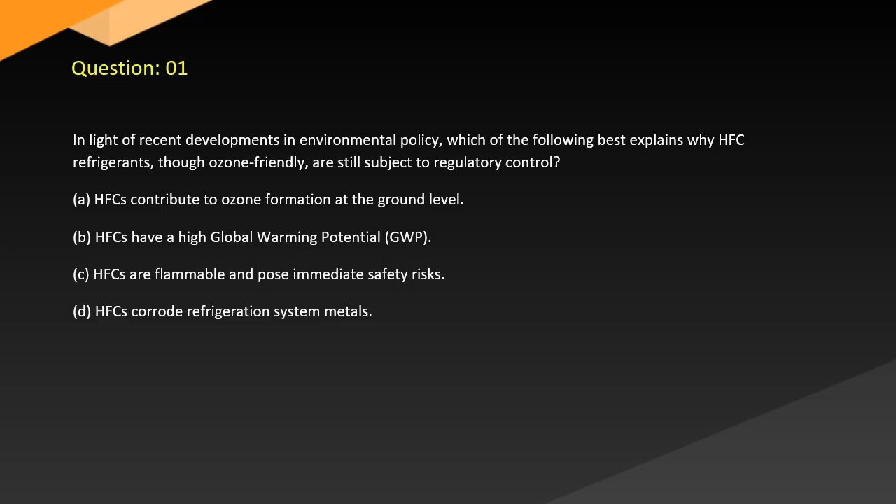Correct answer: B. Explanation: HFCs do not contain chlorine or bromine and therefore do not deplete ozone, but they significantly contribute to climate change. Under the Clean Air Act and the AIM Act (American Innovation and Manufacturing Act), EPA regulates HFCs to reduce their environmental impact. Their regulation aligns with Kigali Amendment goals, even though it is not yet ratified in all jurisdictions. See EPA Fact Sheet on HFC Phasedown, Clean Air Act Section 608, for further reference.

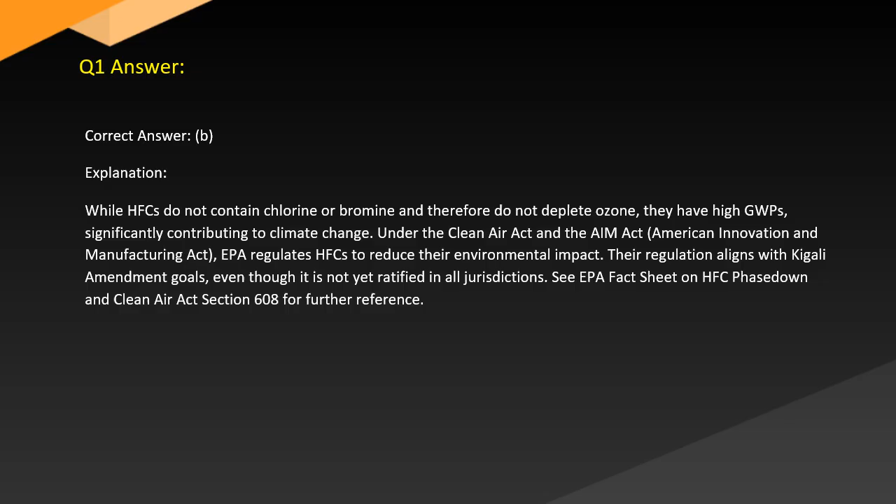Question 2. When evaluating the merits of leak detection, a tech suspects a charge loss in a high-pressure refrigeration system after a rapid rise in superheat and poor cooling. What is the best first step he should take? A. Recharge the system to full capacity and monitor. B. Evacuate the system immediately. C. Conduct an electronic leak check after isolating the system. D. Replace the expansion valve.

Correct answer: C. Explanation: Per EPA guidelines under 40 CFR Part 82 Subpart F, suspected leaks in high-pressure systems should be verified using EPA-approved leak detection methods, including electronic detectors. Charging without confirming the leak violates recovery and repair obligations, and unnecessary evacuation risks contamination. Superheat rise typically indicates undercharging due to leakage, not component failure.

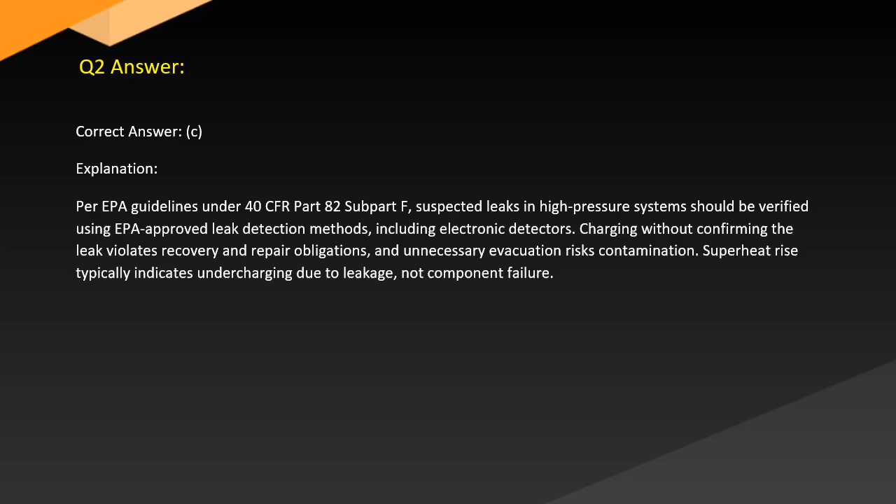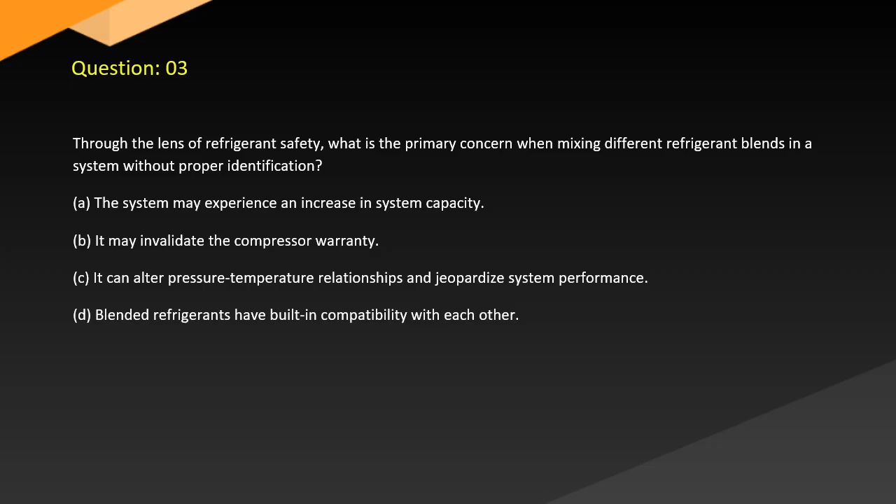Question 3. Through the lens of refrigerant safety, what is the primary concern when mixing different refrigerant blends in a system without proper identification? A. The system may experience an increase in system capacity. B. It may invalidate the compressor warranty. C. It can alter pressure-temperature relationships and jeopardize system performance. D. Blended refrigerants have built-in compatibility with each other.

Correct answer: C. Explanation: Blends like R-407C or R-404A have precise composition ratios. Mixing different blends or pure refrigerants alters pressure-temperature behavior, resulting in inaccurate superheat or subcooling readings. Potential overpressure and damage is also prohibited under EPA guidelines and voids reclaiming potential. Recovery must not mix refrigerants to preserve reclaim standards. See EPA 608 Rules on Refrigerant Purity.

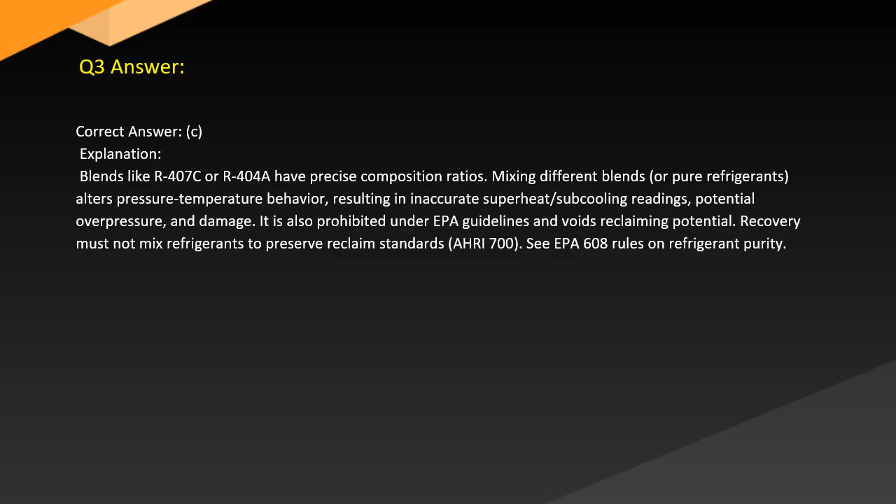Question 4. As illustrated by a recent inspection, Gomez discovered a centrifugal chiller leaking R123. The unit has leaked 20% of its charge within a 12-month period. What is she legally required to do next under EPA regulations? A. Shut down the system permanently. B. Refill the charge and continue operation. C. Repair the leak within 30 days or develop a retrofit retirement plan. D. Conduct another leak check after 60 days.

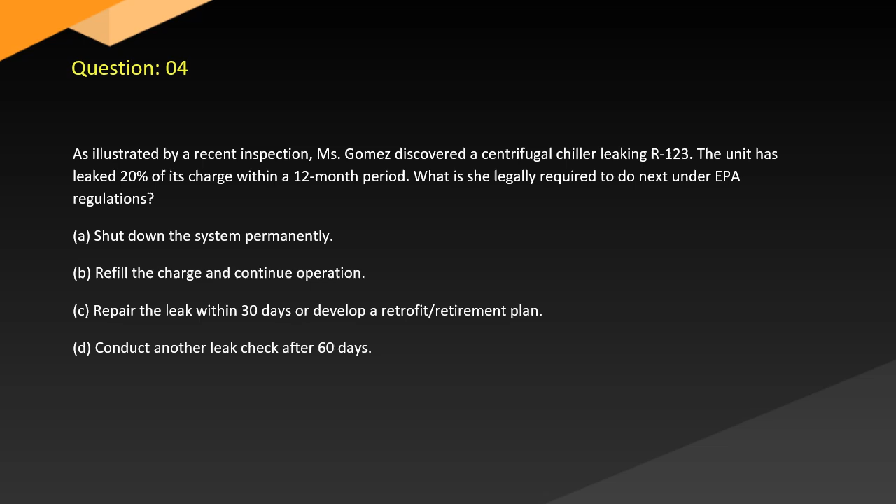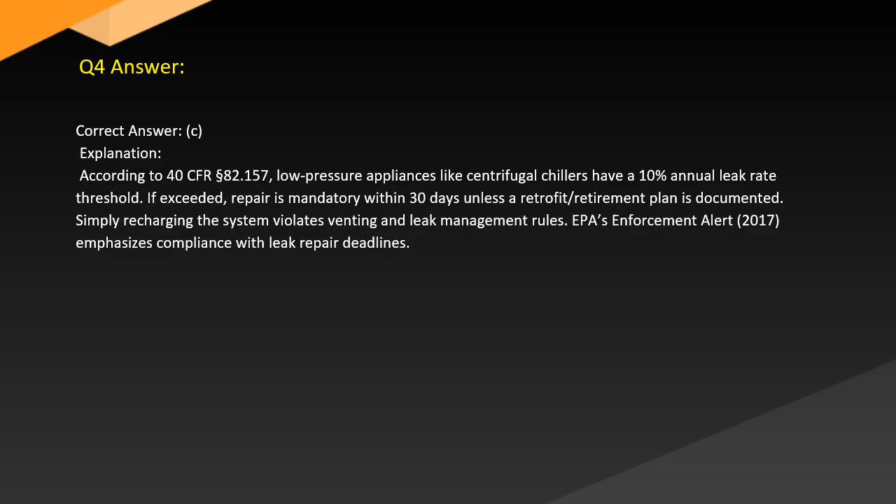Correct answer: C. Explanation: According to 40 CFR Section 82.157, low-pressure appliances like centrifugal chillers have a 10% annual leak rate threshold. If exceeded, repair is mandatory within 30 days unless a retrofit retirement plan is documented. Simply recharging the system violates venting and leak management rules. EPA's Enforcement Alert 2017 emphasizes compliance with leak repair deadlines.

Question 5. When considering safe refrigerant recovery from a system with a non-operating compressor, which technique is most appropriate for maximizing refrigerant removal? A. Use a system-dependent recovery unit. B. Apply vacuum through the suction line only. C. Recover liquid first, then vapor, using both high and low sides. D. Only use passive recovery methods.

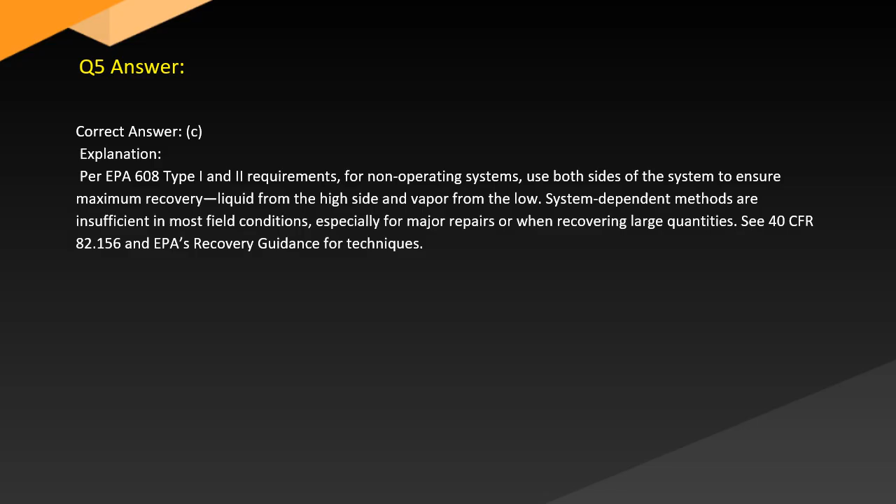Correct answer: C. Explanation: Per EPA 608 Type I and Type II requirements for non-operating systems, use both sides of the system to ensure maximum recovery: liquid from the high side and vapor from the low side. System-dependent methods are insufficient in most field conditions, especially for major repairs or when recovering large quantities. See 40 CFR 82.156 and EPA's recovery guidance techniques.

Question 6. The underlying principle of oil compatibility dictates that using incorrect oil types with specific refrigerants may result in which of the following system failures? A. Faster thermal expansion in capillaries. B. Excessive subcooling in the evaporator. C. Oil logging in the evaporator and compressor wear. D. Increased condensing pressures.

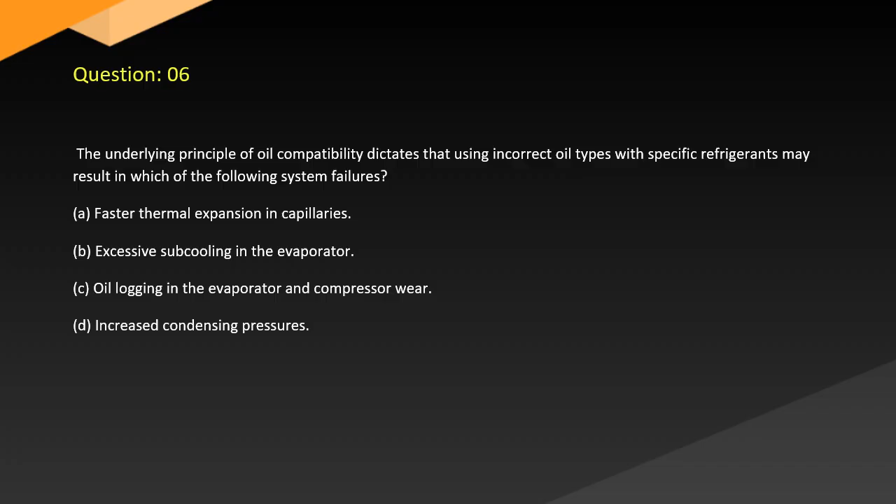Correct answer: C. Explanation: Incompatible oil-refrigerant pairs, like using mineral oil with HFCs, result in poor miscibility, leading to oil trapping, logging, and lack of lubrication in the compressor. This causes wear and system inefficiency. POE oils are often required for HFCs. EPA 608 requires technicians to confirm oil compatibility when retrofitting or charging systems, in line with ASHRAE guidelines.

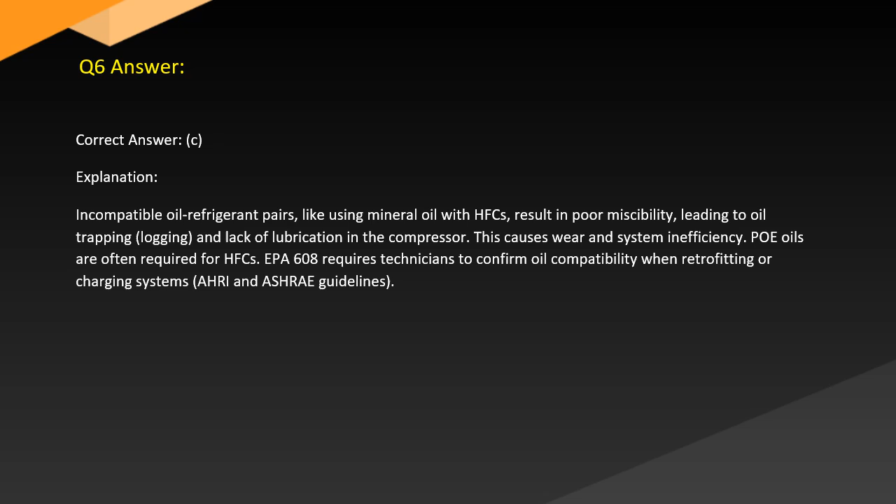Question 7. Taking into account system evacuation procedures, what could occur if Mr. Liu opens a system for servicing and skipped proper dehydration using deep vacuum?

A. The system will perform normally after recharging. B. Moisture will help increase system pressure. C. Acid formation may damage components over time. D. The compressor will increase cooling capacity.

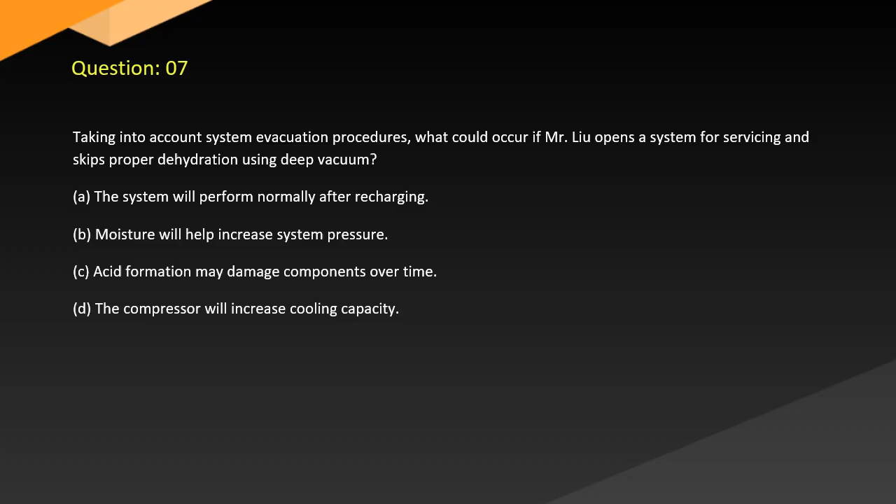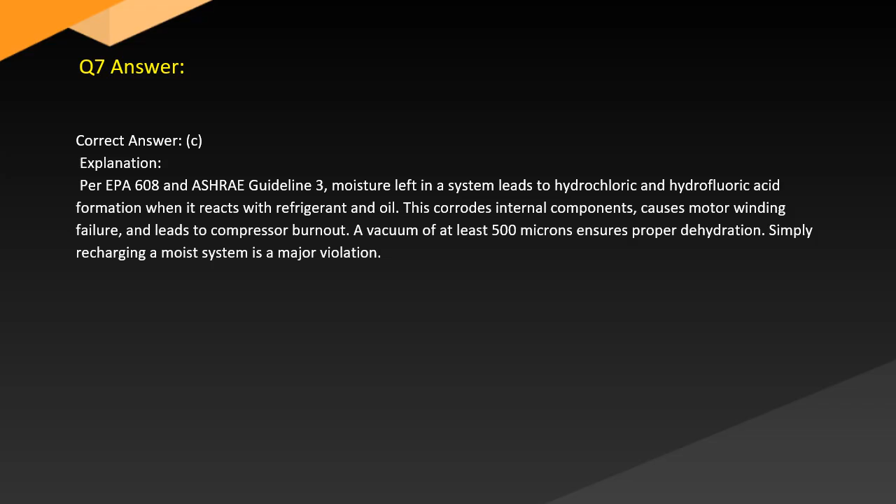Answer: C. Per EPA 608 and ASHRAE Guideline 3, moisture left in the system leads to hydrochloric and hydrofluoric acid formation when it reacts with refrigerant and oil. This corrodes internal components, causes motor winding failure, and leads to compressor burnout. A vacuum of at least 500 microns ensures proper dehydration. Simply recharging a moist system is a major violation.

Question 8. What would happen if a technician releases R-410A into the atmosphere during maintenance without recovery equipment?

A. It will enhance system performance due to fresh air entry. B. It will comply with current EPA venting exemptions. C. It constitutes a violation under Section 608 of the Clean Air Act. D. It is allowed if the system holds less than 5 pounds of charge.

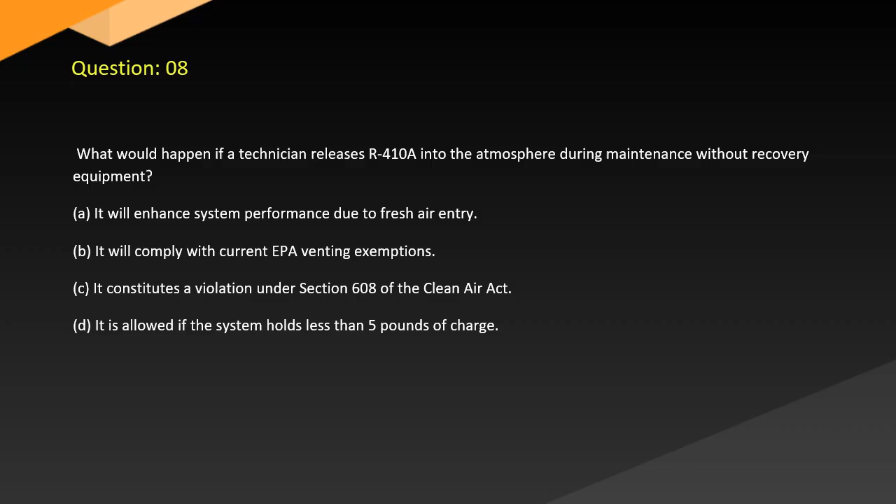Answer: C. Venting any refrigerant, including HFCs like R-410A, is illegal under the Clean Air Act Section 608, regardless of ozone depletion potential. All refrigerants must be recovered using certified equipment. Exemptions apply only to carbon dioxide, ammonia, and hydrocarbons under specific conditions. EPA enforcement can include penalties of up to $44,539 per day per violation.

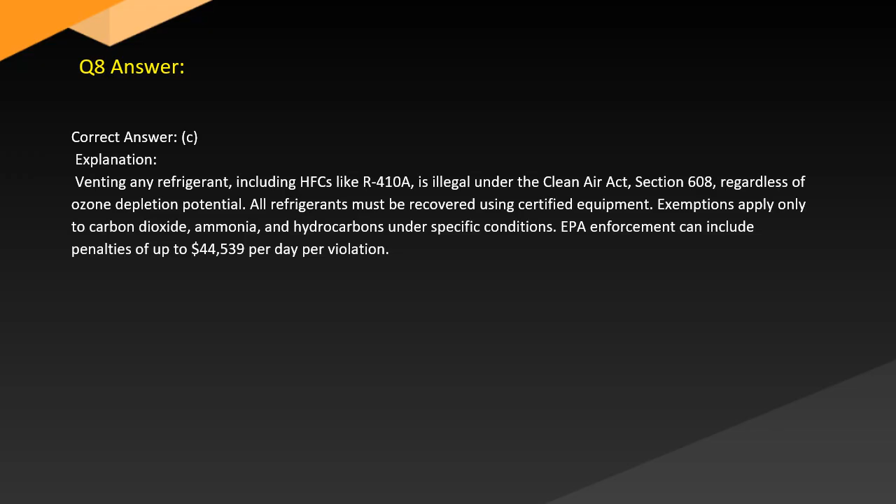A. Liquid charging prevents temperature drop. B. Vapor charging ensures blend separation. C. Vapor charging may cause component freezing. D. Charging as vapor separates the blend's components.

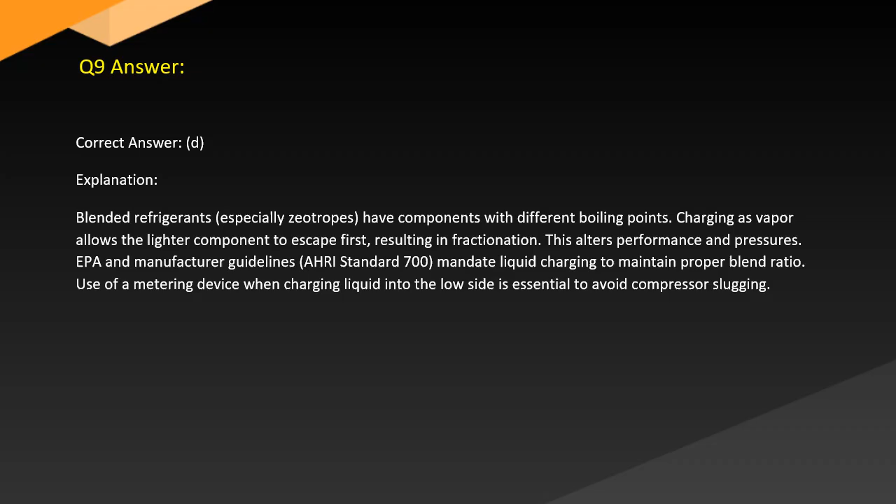Answer: D. Blended refrigerants, especially zeotropes, have components with different boiling points. Charging as vapor allows the lighter component to escape first, resulting in fractionation. This alters performance and pressures. EPA and manufacturer guidelines, AHRI Standard 700, mandate liquid charging to maintain proper blend ratio. Use of a metering device when charging liquid into the low side is essential to avoid compressor slugging.

Question 10. From the perspective of personal safety, what is the most critical reason technicians should never heat a refrigerant cylinder with an open flame?

A. It will make refrigerant recovery faster. B. It reduces the cylinder weight. C. It may cause cylinder explosion or rupture. D. It improves refrigerant purity.

Answer: C. Heating cylinders with an open flame risks raising internal pressure beyond safe design limits, leading to rupture or explosion. DOT-rated refrigerant cylinders are pressure tested and must never be exposed to direct heat. EPA and OSHA guidelines require the use of warm water baths not exceeding 104 Fahrenheit for this purpose. Refer to CFR Title 49 and EPA safety bulletins.

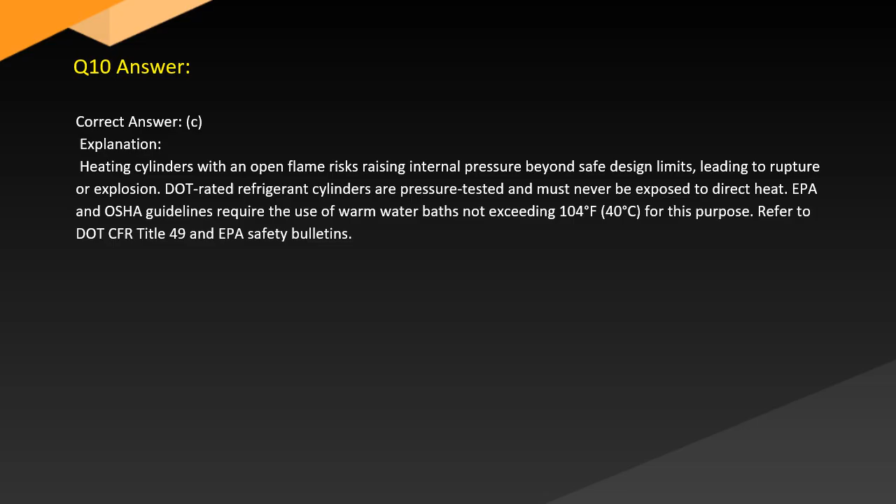Question 11. With respect to proper evacuation procedures, a technician is servicing a low pressure chiller that previously operated with R123. After recovery, what additional action must be taken before the system can be opened for component replacement?

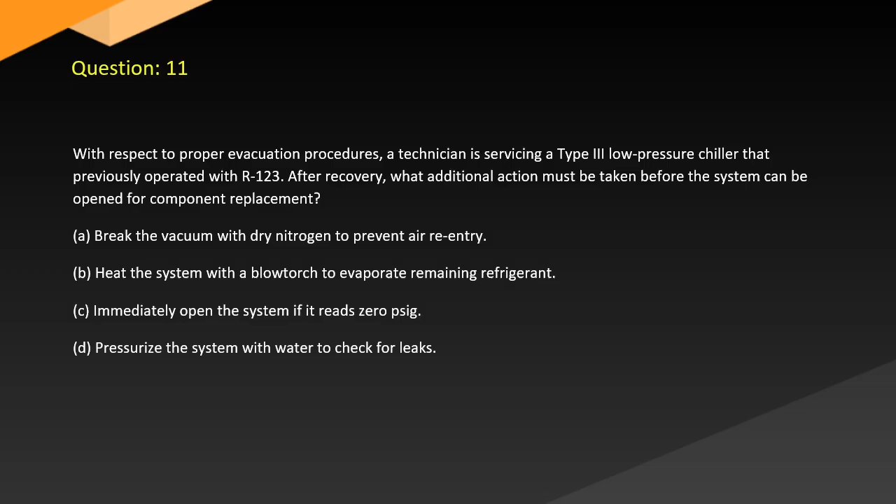A. Break the vacuum with dry nitrogen to prevent air re-entry. B. Heat the system with a blowtorch to evaporate remaining refrigerant. C. Immediately open the system if it reads 0 psig. D. Pressurize the system with water to check for leaks.

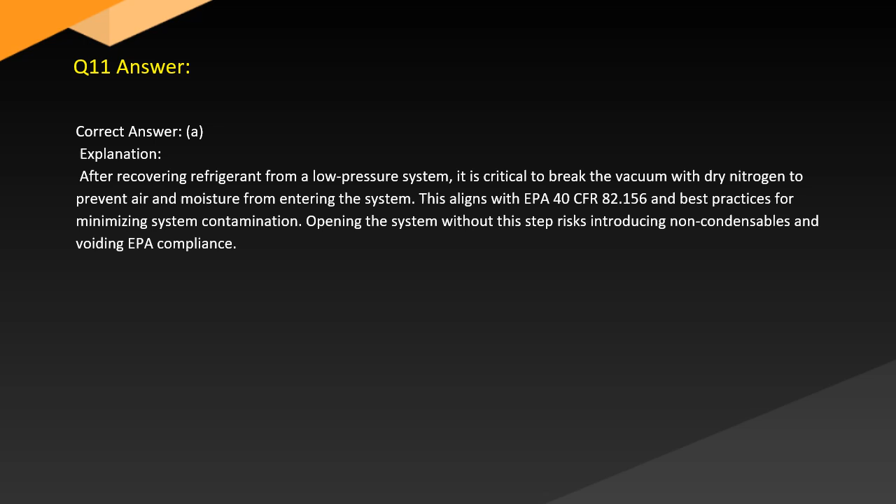Answer: A. After recovering refrigerant from a low-pressure system, it is critical to break the vacuum with dry nitrogen to prevent air and moisture from entering the system. This aligns with EPA 40 CFR 82.156 and best practices for minimizing system contamination. Opening the system without this step risks introducing non-condensables and voiding EPA compliance.

Question 12. According to recent studies, why is the use of hydrocarbon (HC) refrigerants like R600a heavily restricted under EPA 608 despite their benefits?

A. They are too expensive for residential use. B. Their lubricants are incompatible with all compressors. C. Their high flammability creates significant safety risks. D. They corrode copper tubing in systems.

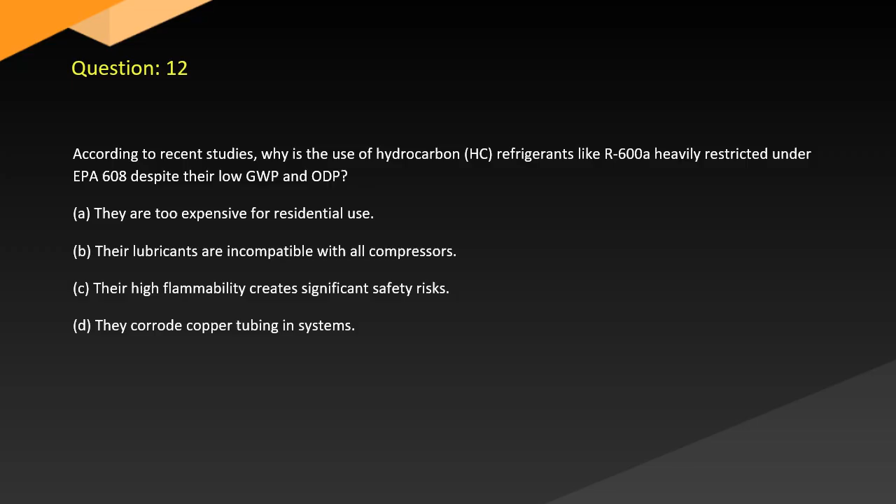Answer: C. HFC alternatives like hydrocarbons, e.g. R600a, R290, have zero ODP and very low GWP, but they are extremely flammable (ASHRAE A3). Their use is restricted by the EPA SNAP program and must follow UL 60335, 2-40 and NFPA safety standards. Units must be factory sealed, labeled, and under charge limits to avoid fire explosion hazards.

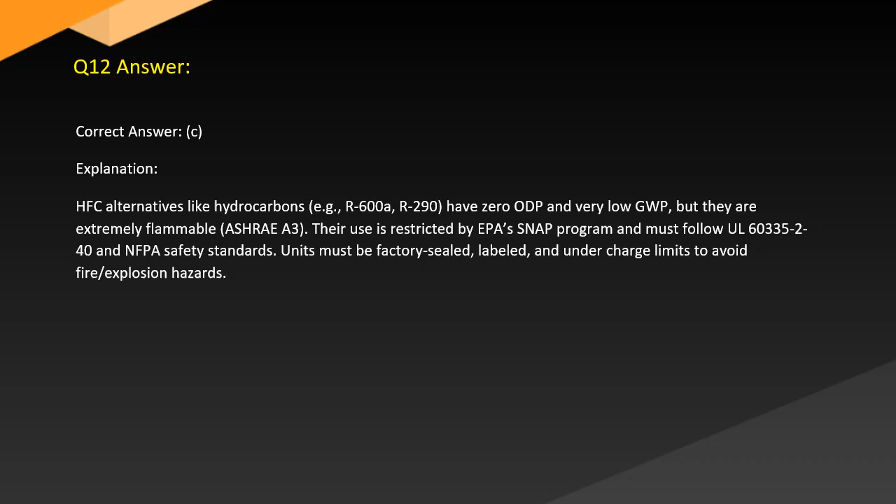Question 13. During the process of reclaiming refrigerants, a technician mixes R22 with R404A during recovery. What are the implications under EPA regulations? A. The mixture can be stored and used in any system. B. The refrigerants can be separated using on-site recovery tools. C. The mixed refrigerants must be sent to a certified reclaimer for destruction. D. The technician may reuse the mixture in self-contained units.

Correct answer: C. Explanation: Mixing refrigerants renders them non-reusable unless processed by a certified reclaimer under AHRI 700 standards. EPA 608 mandates that mixed refrigerants must be destroyed or reprocessed. Technicians cannot reuse or recycle them. This avoids system damage, improper pressures, and environmental risk. Refer to 40 CFR 82.154 and reclaim guidelines.

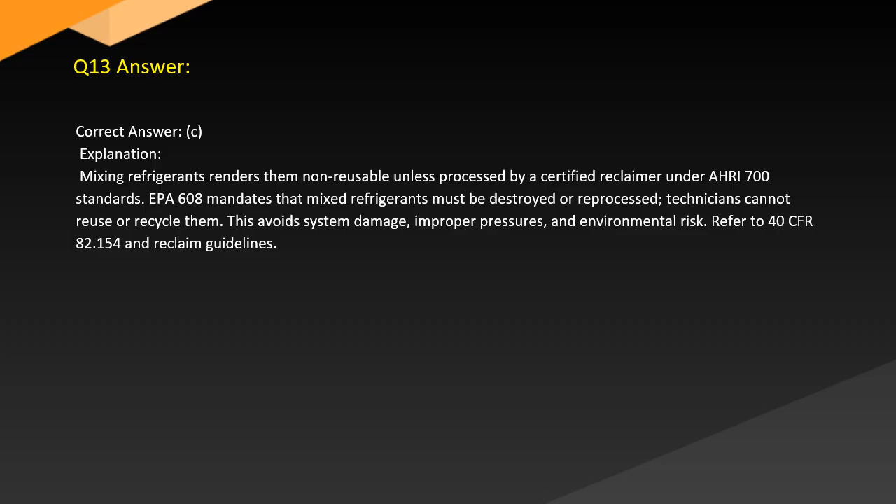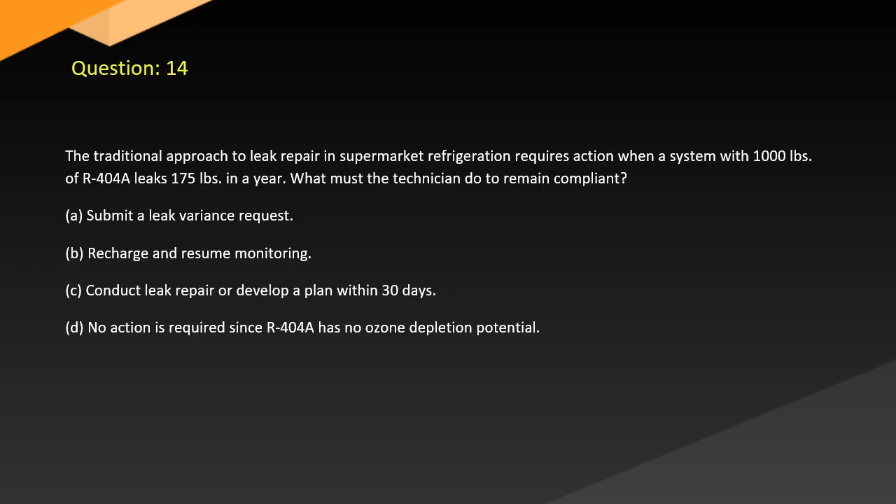Question 14. The traditional approach to leak repair in supermarket refrigeration requires action when a system with 1000 pounds of R404A leaks 175 pounds in a year. What must the technician do to remain compliant? A. Submit a leak variance request. B. Recharge and resume monitoring. C. Conduct leak repair or develop a plan within 30 days. D. No action is required since R404A has no ozone depletion potential.

Correct answer: C. Explanation: Large commercial refrigeration systems with more than 50 pounds charge must not exceed a 20% annual leak rate. A 175 lb leak from 1000 pounds equals 17.5%, which is under the limit, but if the rate ever exceeds 20%, repair must begin within 30 days or a retrofit plan must be submitted. See Section 608 and EPA's compliance guidelines.

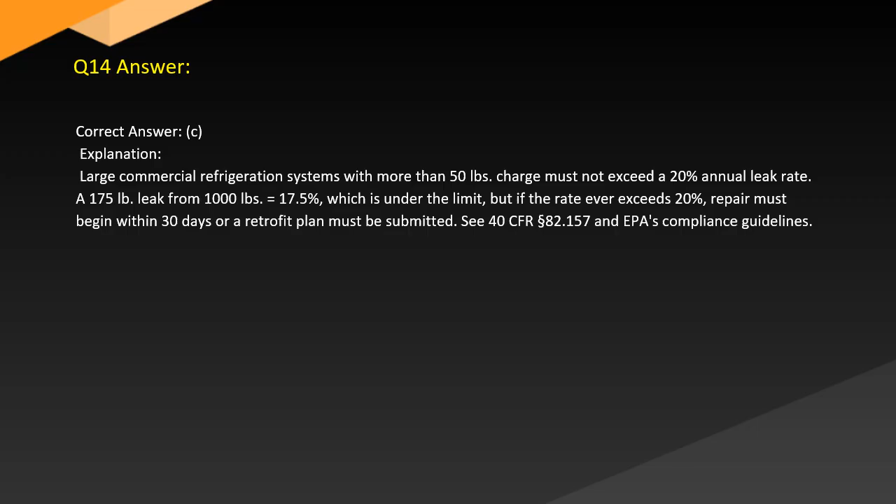Question 15. In the context of system compatibility, what issue might arise if POE oil is added to a system originally designed for mineral oil without a complete oil flush? A. The system will generate high-pressure cutouts. B. POE will clean the coils and improve cooling. C. The mixture may cause oil foaming and acid formation. D. Oil compatibility does not affect performance.

Correct answer: C. Explanation: Mixing POE and mineral oils can cause oil separation, foaming, and poor lubricant return. POE also absorbs moisture easily, promoting acid formation that damages windings and seals. EPA and manufacturer retrofitting protocols require complete flushing before switching oils. Refer to AHRI 700 and compressor manufacturer guidelines for oil change procedures.

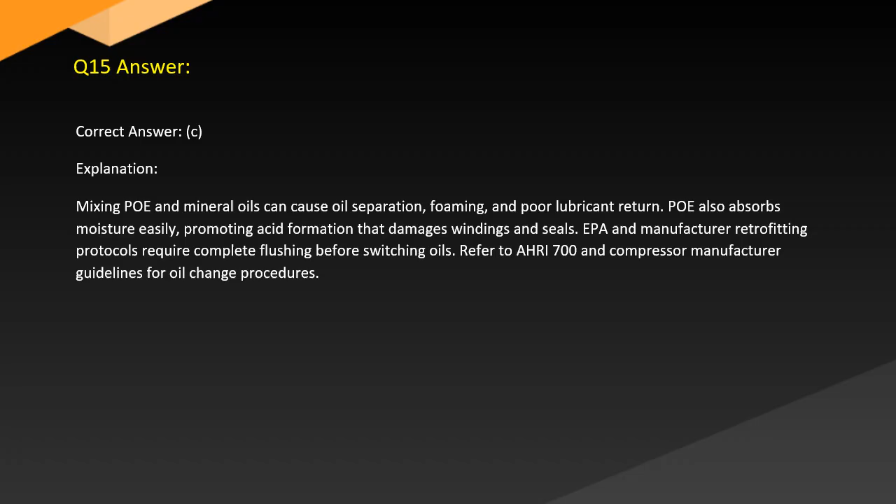Question 16. Given the circumstances surrounding system pressure-temperature relationships, what is the expected behavior of a high glide blend like R407C during phase change? A. The refrigerant maintains constant boiling temperature. B. The blend separates, leaving only high-pressure components. C. There is a temperature glide, causing varying boiling and condensing temperatures. D. It acts identically to azeotropic blends like R404A.

Correct answer: C. Explanation: R407C is a zeotropic blend with a glide of 10 degrees F. It does not boil or condense at a single temperature, requiring accurate superheat and subcooling measurement. Ignoring glide may lead to system inefficiency. Use midpoint temperatures on PT charts when charging or diagnosing. Refer to EPA technician guidance on zeotropes.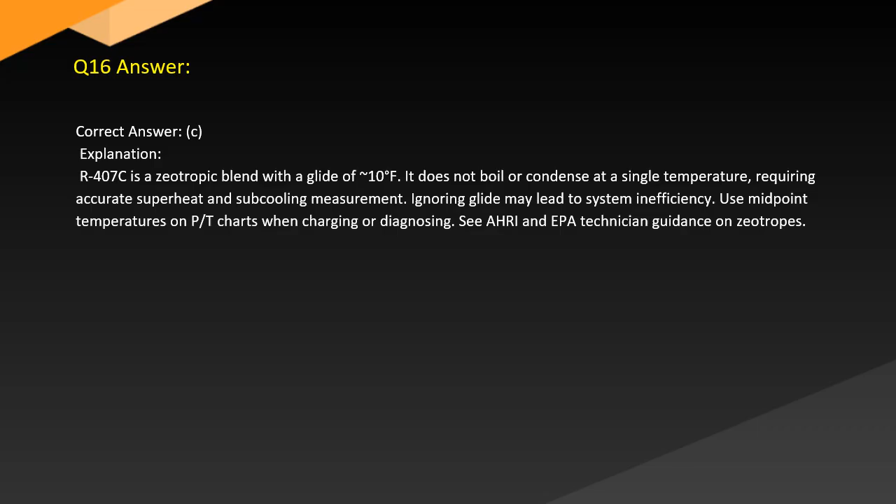Question 17. Upon closer examination of evacuation techniques, which method ensures proper removal of moisture from a refrigeration system before charging? A. Purging the system with refrigerant gas. B. Using a vacuum pump to reach 500 microns or lower. C. Running the compressor during the evacuation. D. Filling the system with nitrogen and leaving it overnight.

Correct answer: B. Explanation: Evacuation to at least 500 microns, 29.9 inches Hg, ensures moisture removal. Moisture left behind can freeze in expansion devices or form acid. Purging with refrigerant is illegal venting, and nitrogen alone won't remove moisture. EPA 608 and ASHRAE Guideline 3 recommend micron gauges for verification.

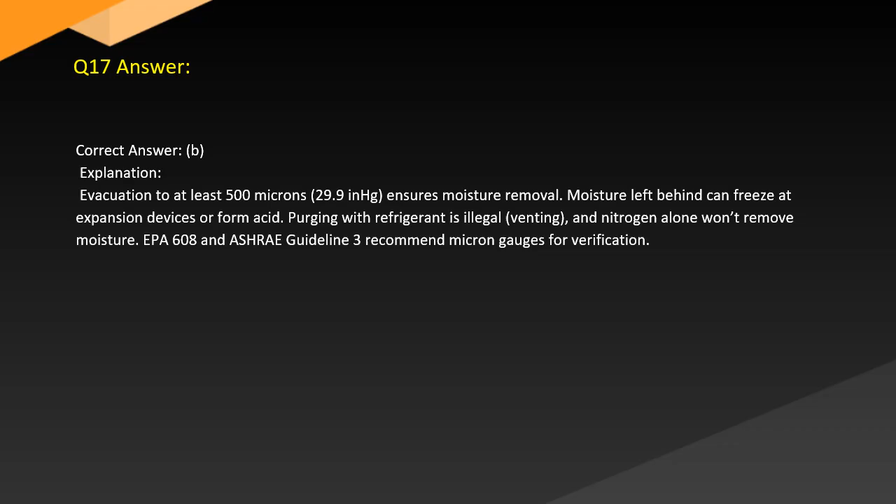Question 18. The Clean Air Act and its requirements impose a universal expectation. What must a technician do before beginning any refrigerant recovery from a system with hermetically sealed components? A. Start the compressor and open the high side valve. B. Verify system pressure exceeds atmospheric pressure. C. Ensure the appliance is operating and then cut the suction line. D. Recover refrigerant using certified recovery equipment.

Correct answer: D. Explanation: Regardless of system size, refrigerant must be recovered using EPA-certified equipment before servicing. Cutting into a sealed system without recovery is a direct violation of Section 608. Even if charge is suspected to be low, recovery is mandatory. Technicians must also be certified to perform recovery. EPA 608 certification required.

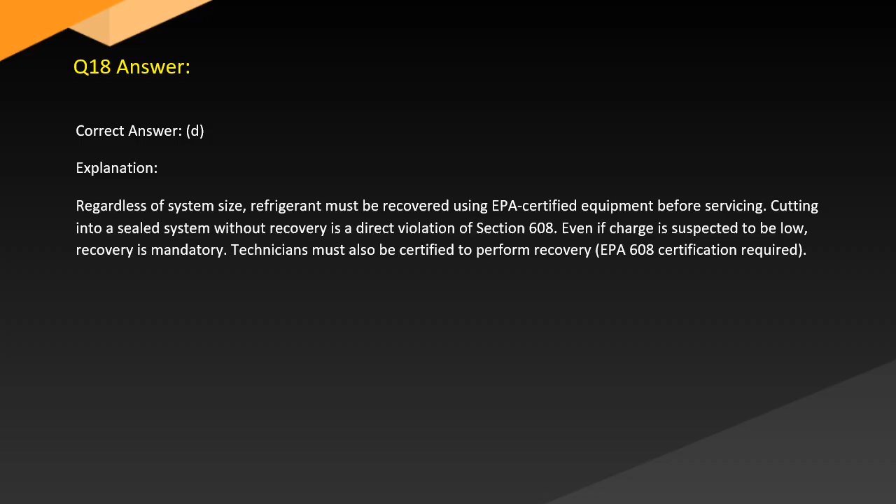Question 19. A common misconception about refrigerant cylinder colors can lead to improper handling. What is the EPA stance regarding the reliance on cylinder color coding for refrigerant identification?

A. It is legally required to use color-coded cylinders only. B. It is acceptable as long as color follows ISO 5145 standards. C. Technicians must verify contents via label or analysis, not color alone. D. Color coding is more accurate than refrigerant analysis tools.

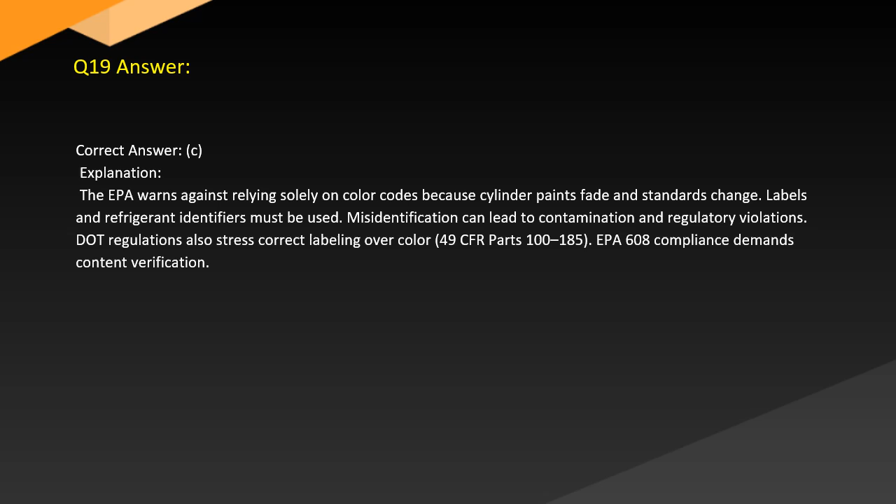Answer: Correct answer, C. Explanation: The EPA warns against relying solely on color codes because cylinder paints fade and standards change. Labels and refrigerant identifiers must be used. Misidentification can lead to contamination and regulatory violations. Regulations also stress correct labeling over color, per 49 CFR Parts 100–185. EPA 608 compliance demands content verification.

Question 20. While examining refrigerant safety procedures, Mr. Bryant is transporting used R22 cylinders in his service van. What requirement must he meet to ensure safety and compliance?

A. Leave the cylinder valves open to relieve pressure. B. Secure cylinders in a vertical position and cap them. C. Place them horizontally for maximum stability. D. Transport them without any labels to avoid confusion.

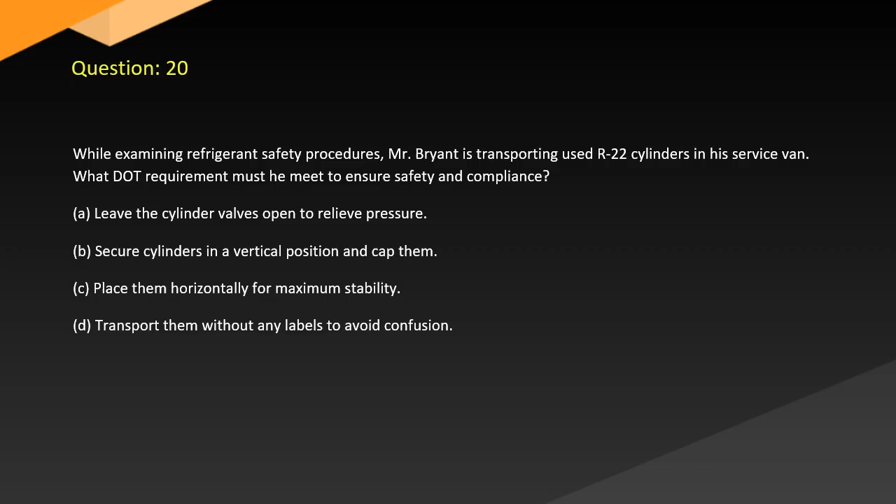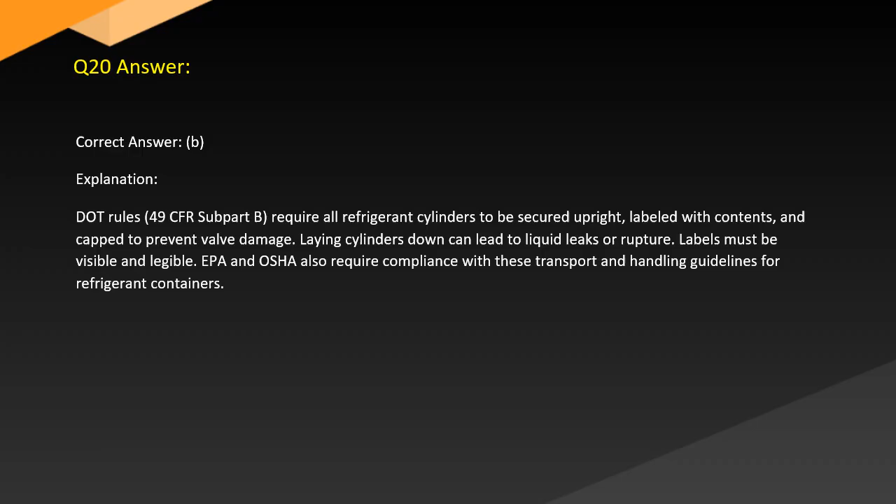Answer: Correct answer, B. Explanation: Rules 49 CFR Subpart B require all refrigerant cylinders to be secured upright, labeled with contents, and capped to prevent valve damage. Laying cylinders down can lead to liquid leaks or rupture. Labels must be visible and legible. EPA and OSHA also require compliance with these transport and handling guidelines for refrigerant containers.

Question 21. While servicing a system, Mr. Carter discovers the refrigerant circuit contains a mixture of R22 and an unknown substance. What is the EPA-compliant action to take before proceeding?

A. Recover the mixture and dispose of it as hazardous waste. B. Attempt to separate the refrigerants using standard recovery tools. C. Recover the mixture and send it to a certified reclaimer. D. Vent the system to remove contaminated refrigerant.

Answer: Correct answer, C. Explanation: Mixed refrigerants must be sent to a certified EPA reclaimer for proper processing or destruction. Standard recovery machines cannot separate mixed refrigerants. Venting any refrigerant is illegal under Section 608 of the Clean Air Act. The mixture cannot be reused or recycled on site. Refer to 40 CFR 82.154 and ARI 700 purity standards.

Question 22. The foundation of proper system dehydration is ensuring all moisture is removed. Which practice would most effectively ensure moisture removal after a major component replacement?

A. Purging the system with dry nitrogen and skipping evacuation. B. Performing a triple evacuation with a deep vacuum using a micron gauge. C. Running the compressor and watching for low suction pressure. D. Flushing the lines with water and letting them dry overnight.

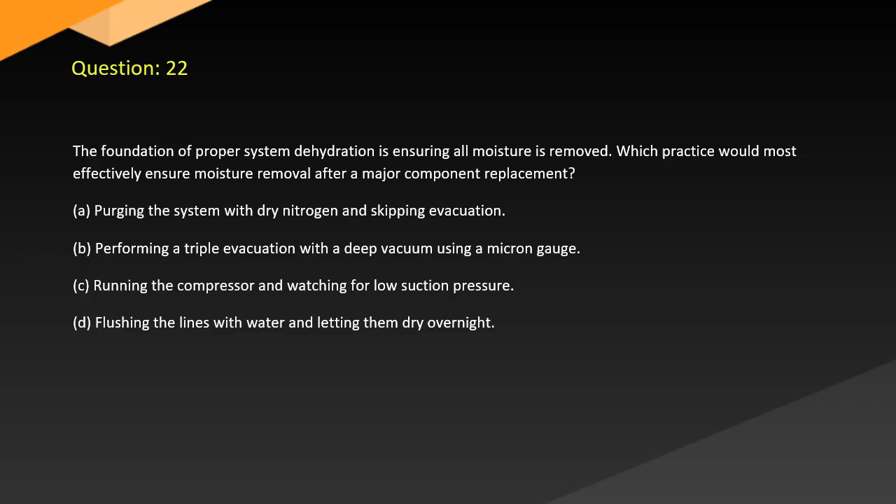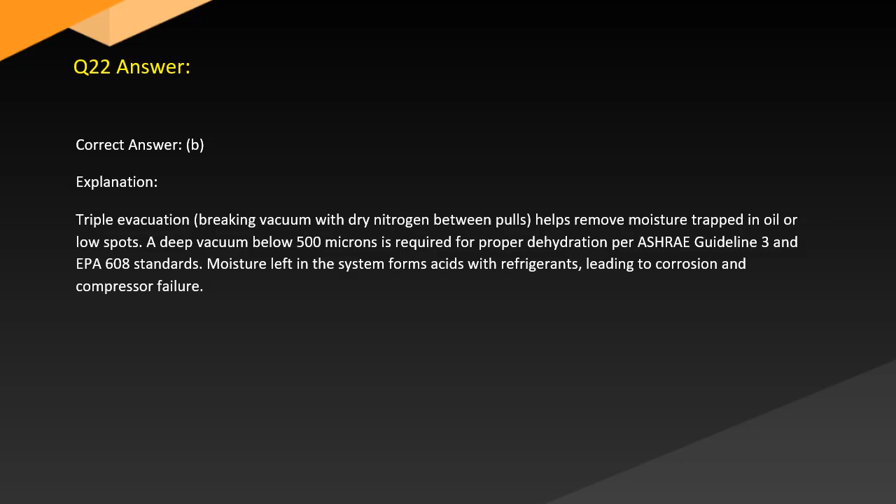Answer: Correct answer, B. Explanation: Triple evacuation, breaking vacuum with dry nitrogen between pulls, helps remove moisture trapped in oil or low spots. A deep vacuum below 500 microns is required for proper dehydration per ASHRAE Guideline 3 and EPA 608 standards. Moisture left in the system forms acids with refrigerants, leading to corrosion and compressor failure.

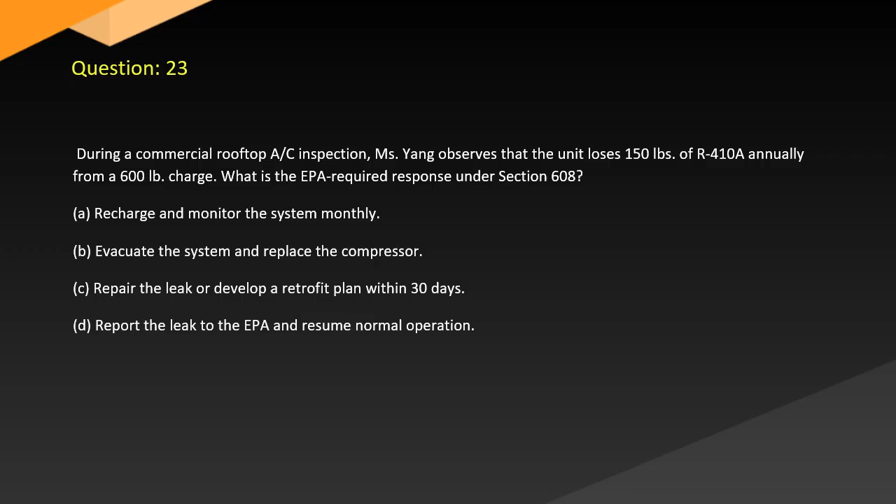A. Recharge and monitor the system monthly. B. Evacuate the system and replace the compressor. C. Repair the leak or develop a retrofit plan within 30 days. D. Report the leak to the EPA and resume normal operation.

Answer: Correct answer, C. Explanation: 150 pounds from 600 pounds equals 25% leak rate, which exceeds the 10% threshold for comfort cooling systems under 40 CFR 82.157. The EPA mandates that leaks over the threshold be repaired within 30 days or documented in a retrofit retirement plan. Recharging without repair is non-compliant. Reporting to the EPA is required only for certain system types and leak rates.

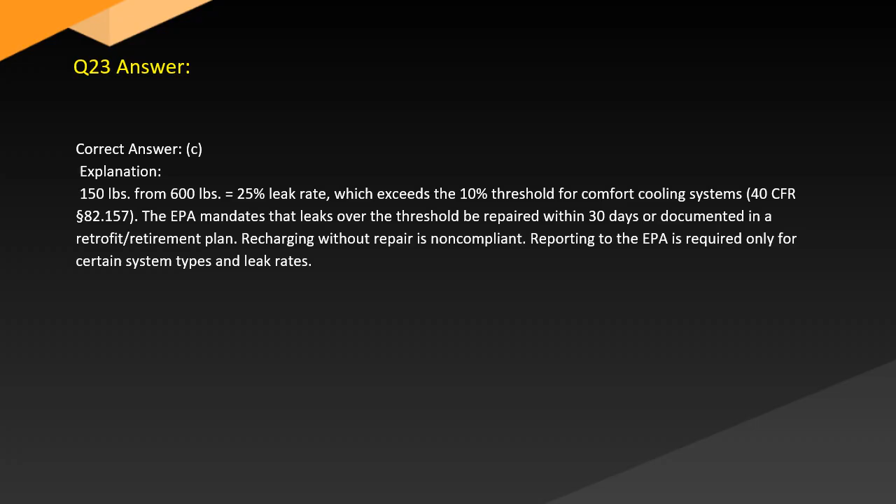Question 24. What factors contribute to the need for using low-pressure chillers with purge units during operation? A. Purge units improve cooling capacity during peak load. B. Low-pressure systems tend to operate above atmospheric pressure. C. These units are required to remove non-condensables that enter due to system vacuum. D. Purge units are designed to filter out high-pressure refrigerant blends.

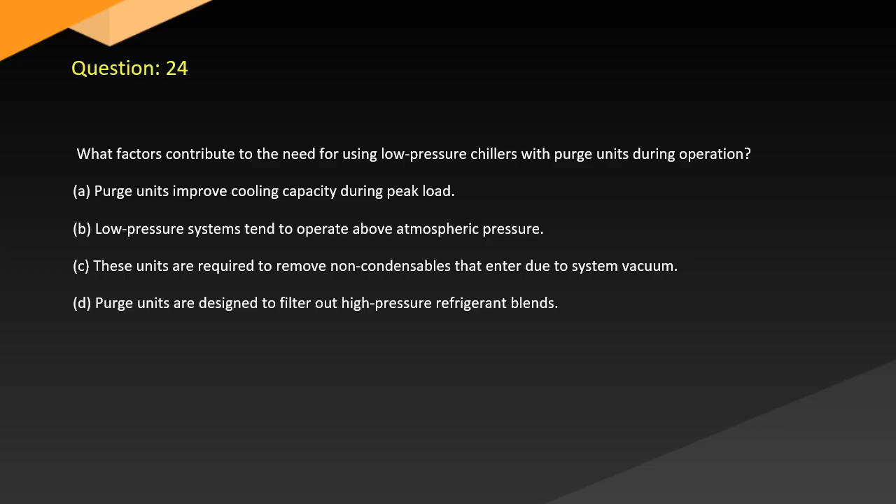Correct answer: C. Explanation: Low-pressure systems, such as those using R123, operate in a vacuum and can draw in air through leaks. Air contains non-condensables, e.g. nitrogen and moisture, reducing efficiency and causing corrosion. Purge units remove these gases. EPA requires monitoring and maintenance to minimize refrigerant loss during purging. See ASHRAE 15 and 40 CFR 82.152.

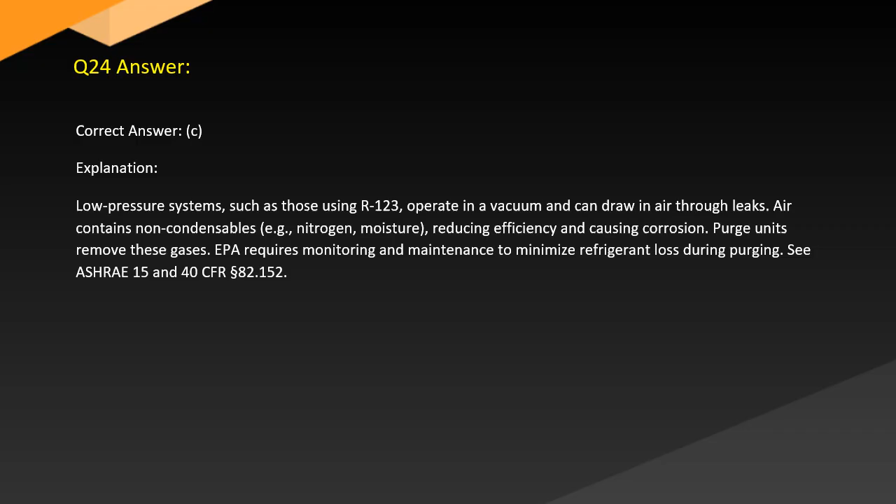Question 25. To better understand the role of oils in system compatibility, which oil type must be used when retrofitting a system to use HFC refrigerants like R134A? A. Mineral oil. B. Alkyl benzene oil. C. Polyol ester (POE) oil. D. Silicone oil.

Correct answer: C. Explanation: POE oil is highly miscible with HFC refrigerants like R134A, ensuring proper oil return and lubrication. Mineral oil is not miscible with HFCs and cannot be used unless a compatibility additive is applied. POE is also hygroscopic and must be handled carefully. Refer to retrofit guidelines and compressor manufacturer specs.

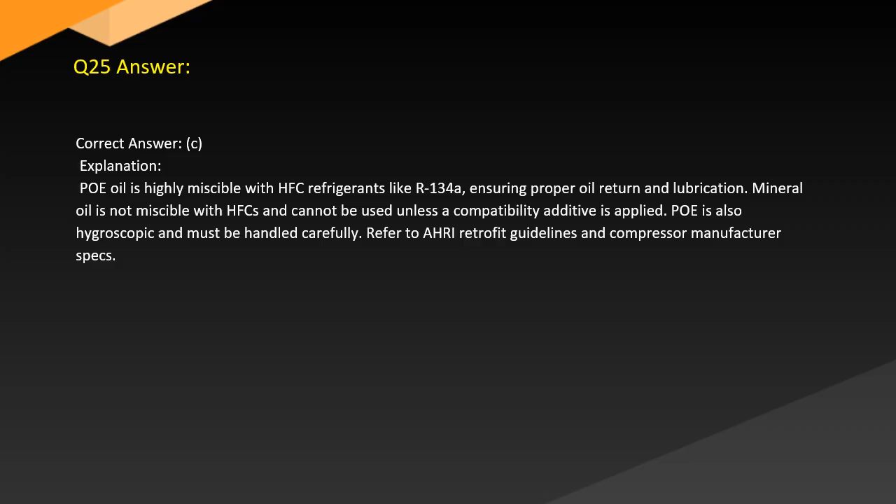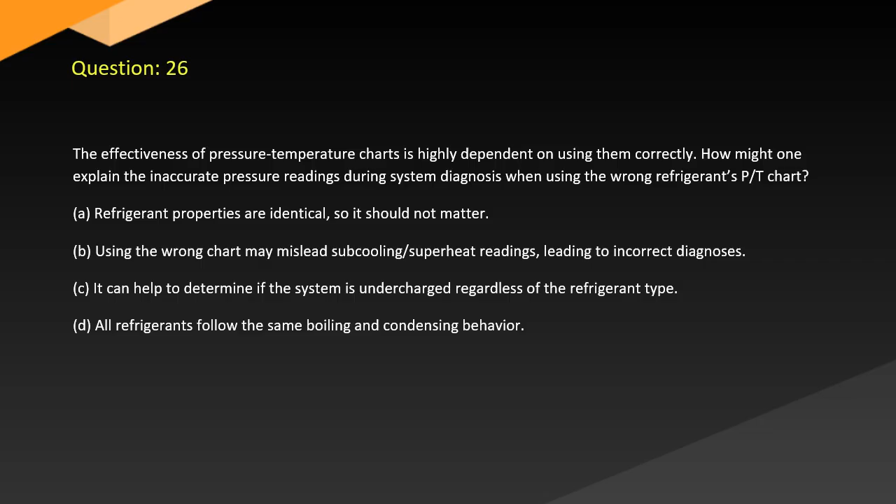Question 26. The effectiveness of pressure-temperature charts is highly dependent on using them correctly. How might one explain the inaccurate pressure readings during system diagnosis when using the wrong refrigerant's PT chart? A. Refrigerant properties are identical, so it should not matter. B. Using the wrong chart may mislead subcooling and superheat readings, leading to incorrect diagnosis. C. It can help determine if the system is undercharged regardless of refrigerant type. D. All refrigerants follow the same boiling and condensing behavior.

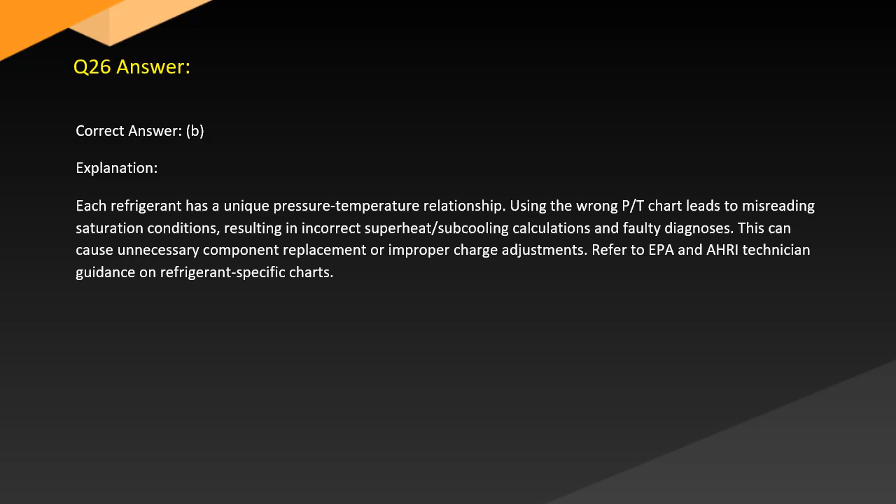Correct answer: B. Explanation: Each refrigerant has a unique pressure-temperature relationship. Using the wrong PT chart leads to misreading saturation conditions, resulting in incorrect superheat and subcooling calculations and faulty diagnoses. This can cause unnecessary component replacement or improper charge adjustments. Refer to EPA and technician guidance on refrigerant-specific charts.

Question 27. The core principles of recovery require a technician to stop recovery and isolate a system when what condition is met? A. The cylinder has reached 60% of its rated capacity. B. The system pressure equalizes with ambient pressure. C. The recovery machine indicates maximum vacuum level has been achieved. D. The recovery process exceeds 5 minutes.

Correct answer: C. Explanation: Recovery should continue until the specified vacuum level is reached per system type and condition, using a certified recovery device. This indicates that the majority of refrigerant has been removed. EPA-required levels for different system types are defined in 40 CFR Section 82.156. Time is not a substitute for pressure verification.

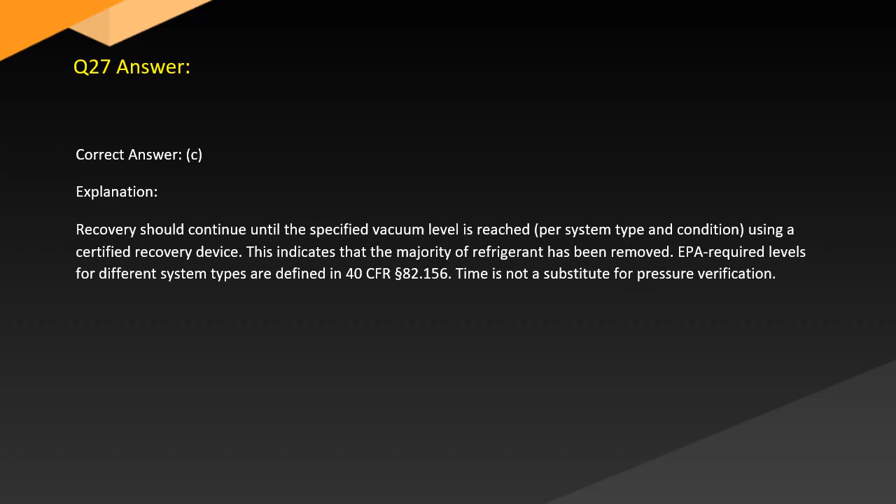Question 28. When analyzing safety measures, why is it prohibited to fill refrigerant cylinders beyond 80% of their capacity? A. It maximizes cylinder reuse value. B. It ensures pressure remains stable when exposed to heat. C. It prevents the cylinder from becoming buoyant in transport. D. It improves charging speed for technicians.

Correct answer: B. Explanation: Refrigerant expands with temperature. Overfilling can lead to excessive internal pressure, risking explosion or cylinder rupture. EPA regulations limit fill level to 80% of water capacity to maintain safe vapor space. See 49 CFR Section 173.301 and EPA refrigerant handling guidelines.

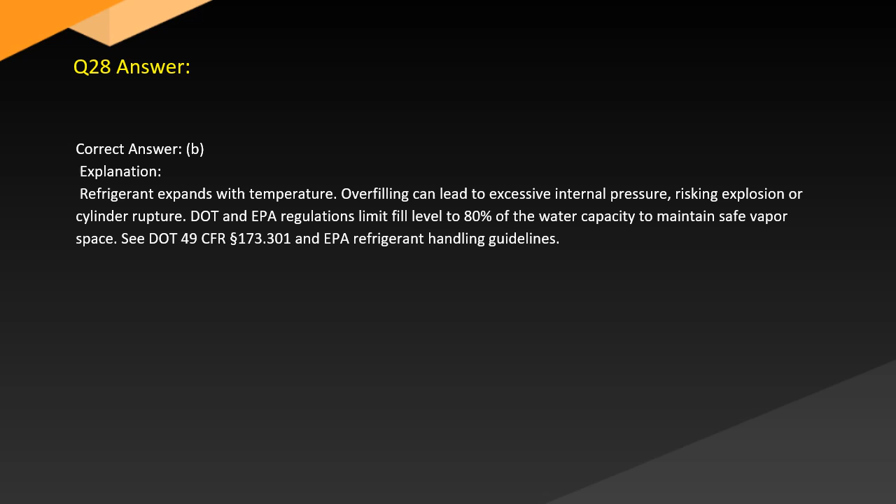Question 29. In the modern context of refrigerant classification, which statement correctly distinguishes HFOs (hydrofluoroolefins) from HFCs? A. HFOs are less flammable than HFCs. B. HFOs have higher ODP than HFCs. C. HFOs have low GWP and break down quickly in the atmosphere. D. HFOs are banned under the SNAP program.

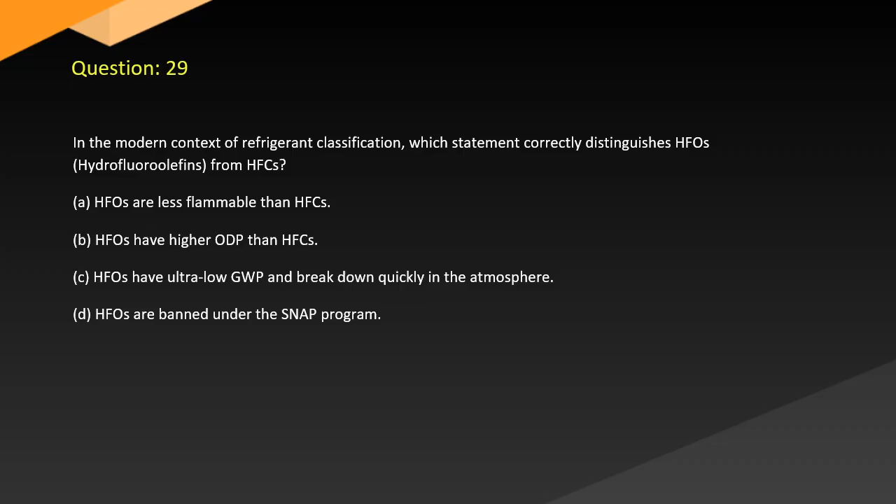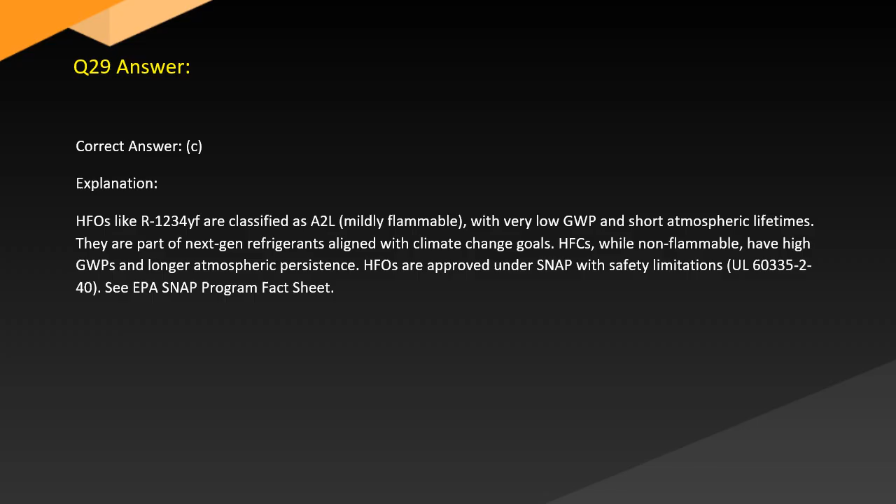Correct answer: C. Explanation: HFOs like R1234yf are classified as A2L, mildly flammable with very short atmospheric lifetimes. They are part of next-gen refrigerants aligned with climate change goals. HFCs, while non-flammable, have higher GWP and longer atmospheric persistence. HFOs are approved under SNAP with safety limitations per UL 60335-2-40. See EPA SNAP program fact sheet.

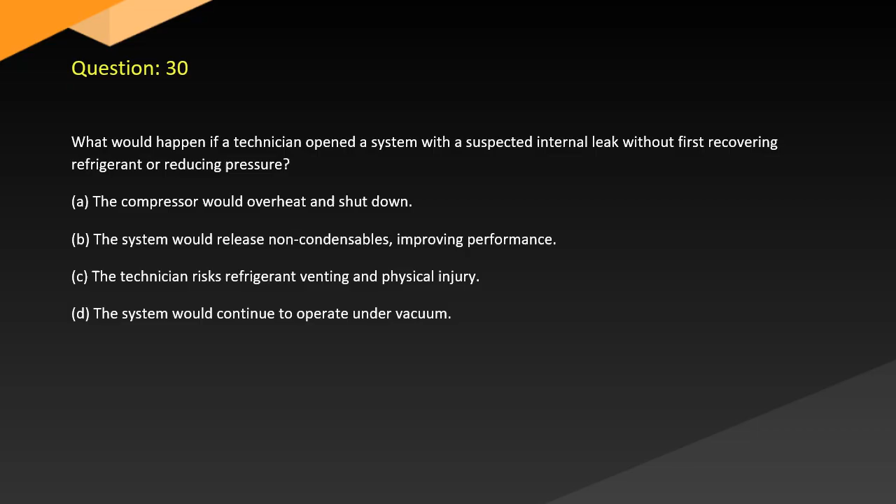Question 30. What would happen if a technician opened a system with a suspected internal leak without first recovering refrigerant or reducing pressure? A. The compressor would overheat and shut down. B. The system would release non-condensables, improving performance. C. The technician risks refrigerant venting and physical injury. D. The system would continue to operate under vacuum.

Correct answer: C. Explanation: Opening a pressurized system without recovery is dangerous and illegal. Refrigerant may rapidly escape, causing frostbite, eye injury, or respiratory issues. It also violates EPA's no-venting rule under Section 608 of the Clean Air Act. Safe servicing requires recovery to EPA-specified levels before opening. Refer to EPA refrigerant safety protocols.